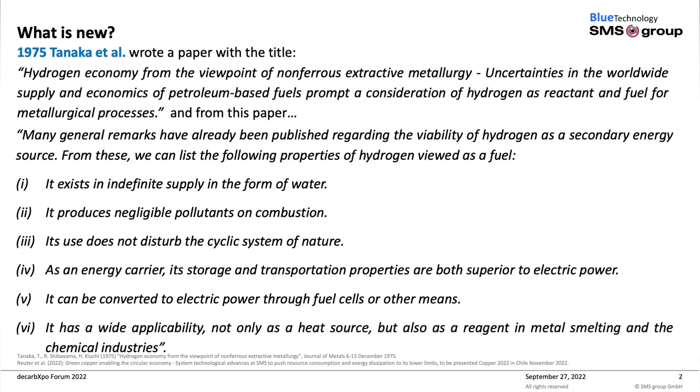This specifically focused on the non-ferrous industry, how you can use hydrogen, for instance, after the oil shock in '73. It's obviously a busy slide, but if you look through this, you'll see all the words we are probably using today: water, circularity, benign, not affecting the environment, etc. It's all there. So I would always recommend, and that's what I say sometimes to students, go and read the stuff in the past.

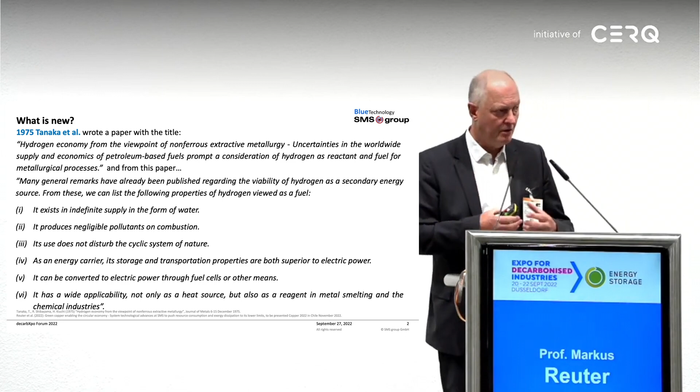You'll be surprised what is already there and has been discussed. Tanaka et al. at the time in Japan looked at this in fair detail, using hydrogen not only as a fuel but also as a reductant. I'll come back to that a bit later, because that is stuff we also do at SMS, which is a very large OEM, original equipment manufacturer for steel technology, but also for copper and non-ferrous. I'll obviously be focusing more on non-ferrous, which is my career.

As I said, I'd like first to define what circularity is in the real sense, because there's a lot of hand-waving going on, and sometimes disconcerting hand-waving. The beauty of it connects a lot of things from the mine to the product, its recycling, collection, and everything that goes with it. Sometimes little bits and pieces are taken out and put up on a high sort of banner that will save all and get all the metals back.

But one thing that always bothers me is that people never really look at the true losses from that system—not only the material losses, but also the thermodynamic losses from that system. Excuse me for being academic, but if I speak about circularity, it's never without thermodynamics in the background, and not only the first law, but the second law specifically. What are the dissipative losses which you really can't return back into the cycle?

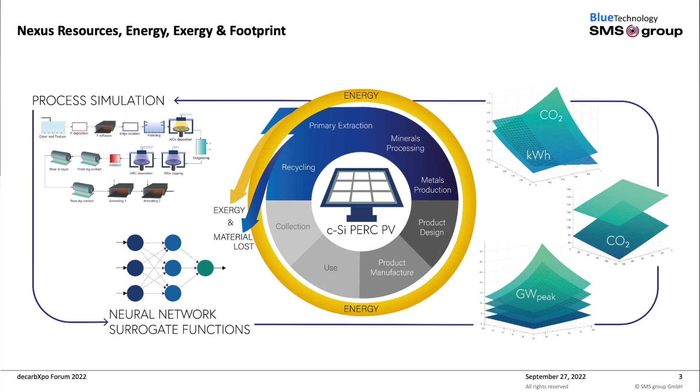Just saying design for recycling is great, or we can close the loop—but I always say that's the Excel mafia trying to close the loop on an Excel sheet. In fact, if you really want to understand this, you need to go to the detail that we, for instance, at SMS do when we design a plant and actually offer a solution that closes that loop.

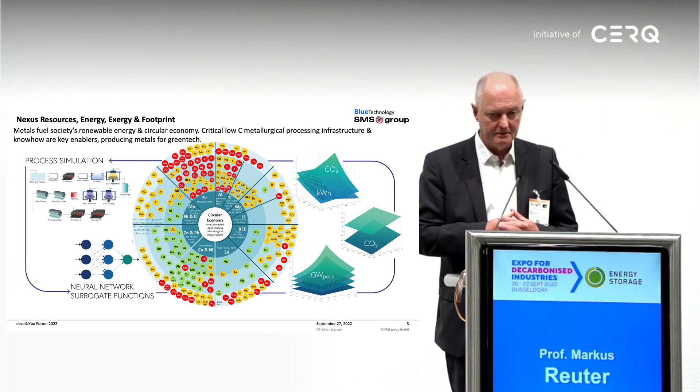What I always try to explain, and this has a long history, is this wheel—we call it the metal wheel—which explains quite simply the following. In the specific times at the moment, one can really recognize the importance of this. You need a base metal industry in society. You need to be able to produce steel, copper, zinc, lead, nickel, etc. That's the inner circle. If you don't have that, you can't recycle.

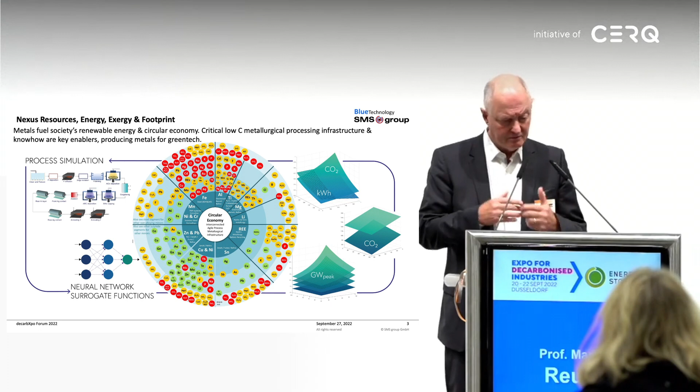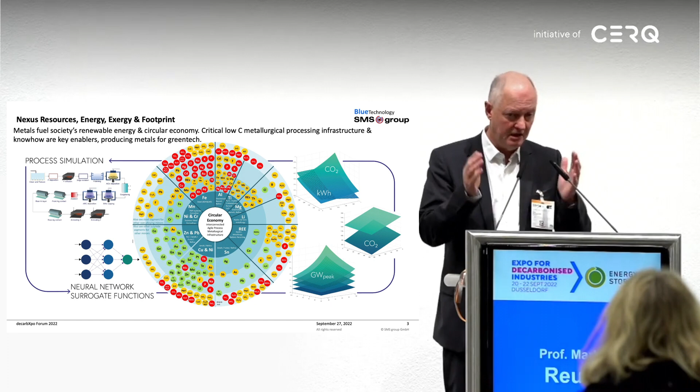Whatever you think and whatever hand waving you do, you can't recover the metals back at the quality required by the products. Have a look at this drawing at your own leisure in publications we've done. But as a summary, you need at the heart of any system in a region, be it Germany, the EU, or wherever, you need the metallurgy to do this, and economically, by the way.

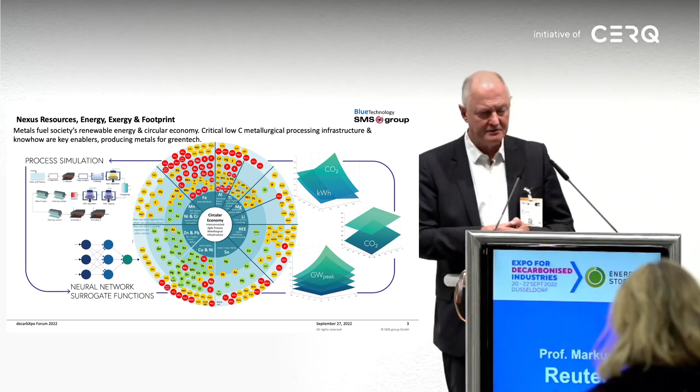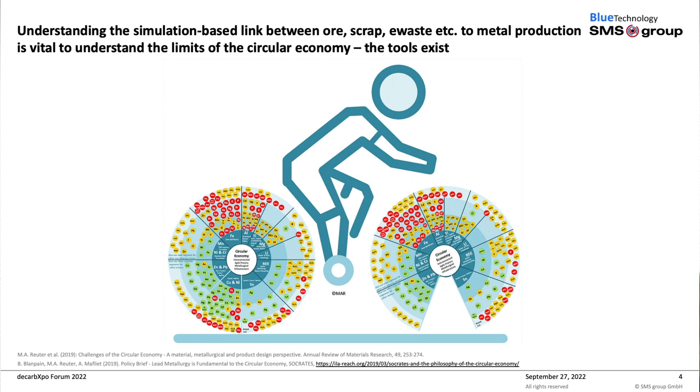So the policy implication of this was the following, and this figure specifically had the intent to inform, among others, the EU and policy. Removing any sector from that system crashes the system, like this figure shows. So we wrote a policy brief on this, showing that you need the metal wheel with all its complexity to do this. To airbrush it and make it all simple, and say it's all too difficult, is just impossible.

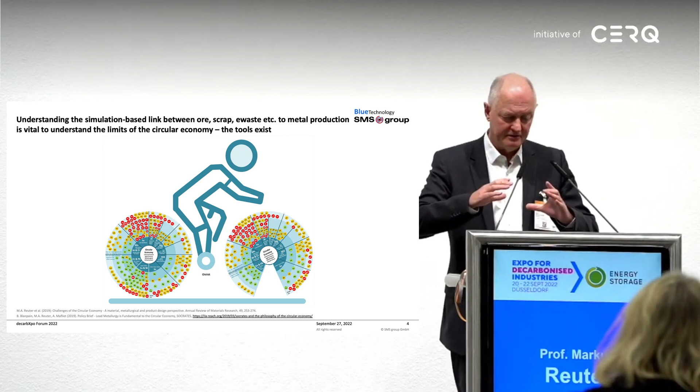You need it, and we as metallurgists know how to deal with this. That's why in my long career, close to 40 years, I've always tried to protect the metallurgical infrastructure as the key enabler for circularity. If you can't bring the metals back, you're just hand waving. It's nice ideas, nice reports, nice stuff.

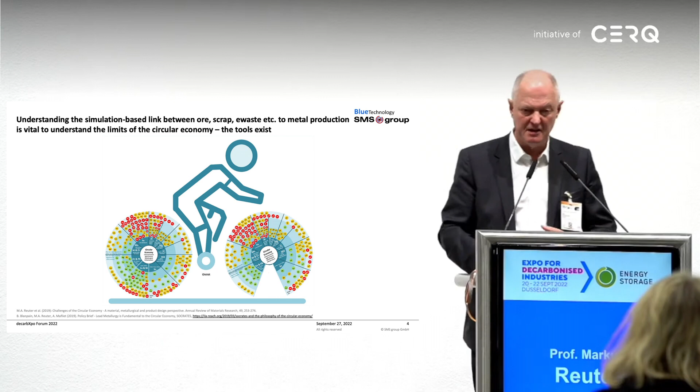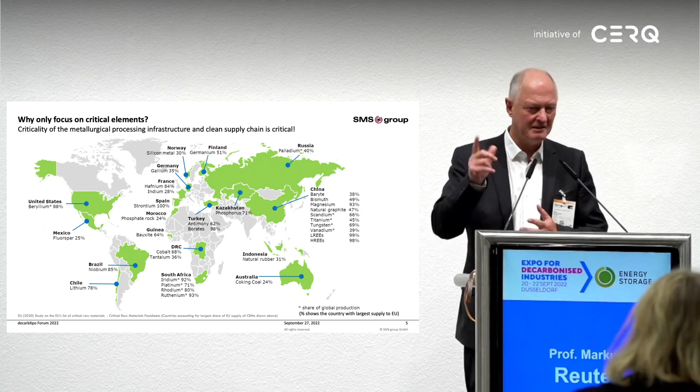So that brings me to the next sheet, that there's a lot of nice reports always appearing on criticality of materials, elements. And I say, well, guys, if we don't have the infrastructure to actually produce the metals, everything's critical. And we see that at the moment. But we are merely writing these nice reports which explain how critical things are. Then I say, well, get the plants to do actually the recycling. This is meant as a provocative question, so if you have a question, later on.

Coming back to a brief, I was told very clearly not to do any sort of sales talk here, so I've kept it purposefully down to some physics as well.

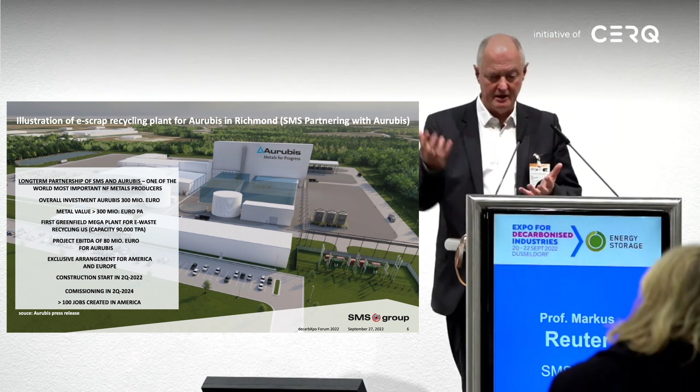Here's a nice example from our company, SMS, which is building this e-waste recycling plant in the US. It's the first greenfield plant that has been built in a long time in the US, by a German company, Aurubis, which is situated in Hamburg. It's actually trying to bring this together, bringing e-waste, which contains many elements, back into the cycle with the whole refining infrastructure of the metallurgical industry. So a very interesting example.

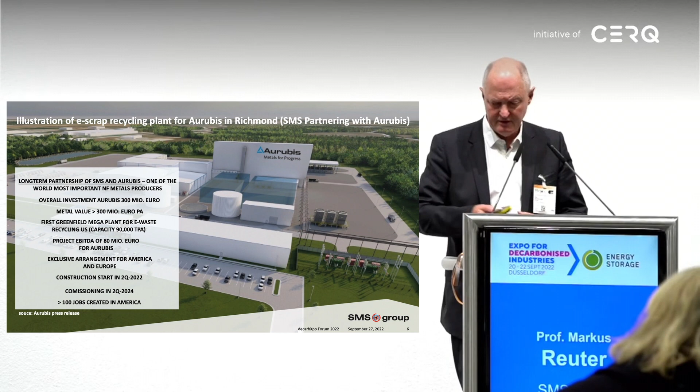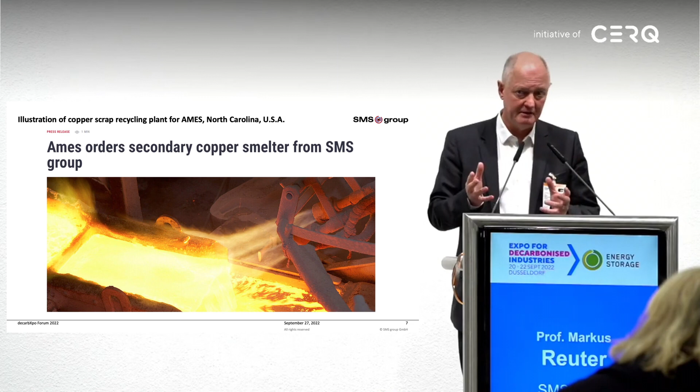We're just in the process of designing this very interesting project, and obviously also processing a fair number of tonnages of material. Here's another one, this is copper recycling, also in the US, in this case in North Carolina, and just actually doing this. So what I'm saying now, it's not just hand waving, it's happening, and it should happen at various places in the world, and most certainly also in Europe.

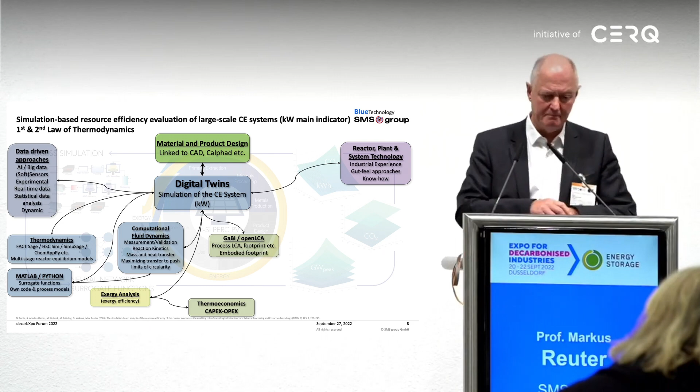So let me get back to some theory once again. The previous talk was speaking about AI and big data. I did my PhD on AI 30 years ago. We tried to apply it in our industry, and it's now obviously mainstream. But if you want to understand the big systems, you cannot use Excel sheets, you cannot just do some simple flows of materials. You need to understand the physics.

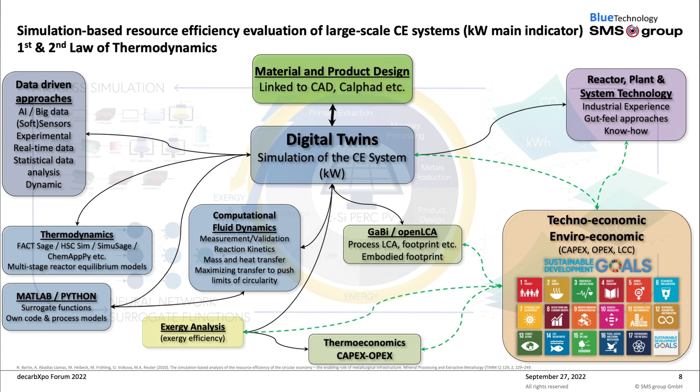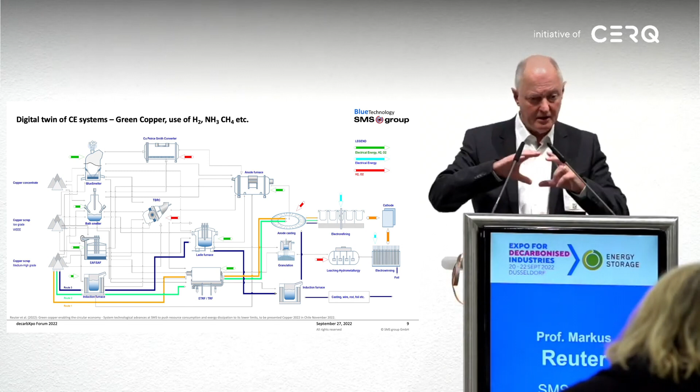So here we just show what we do also internally in SMS. We bring these tools together to design plants. Once again, it's not just theory, it's practice to do this, and obviously then bringing together the sustainability goals if you can. So an example, and once again, perhaps too complex a figure for this venue.

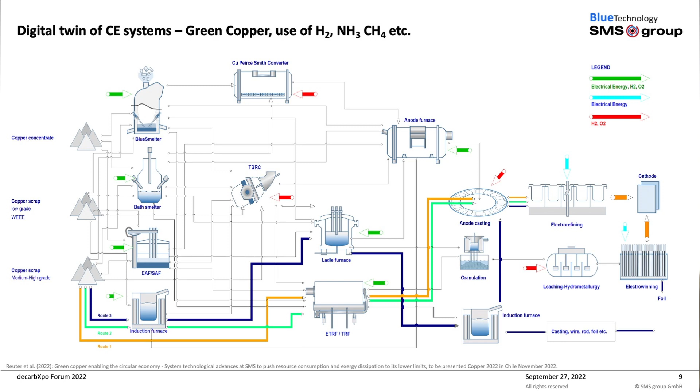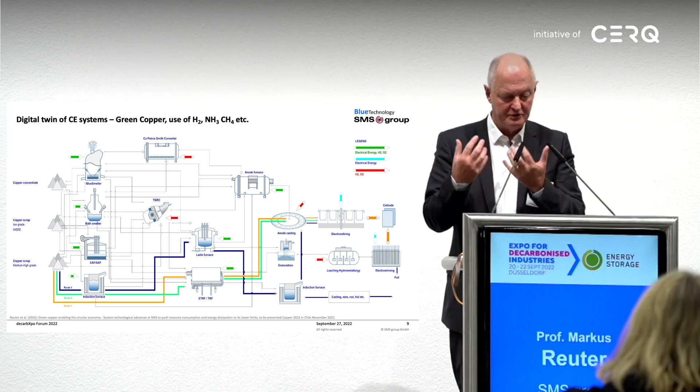Here we're trying to understand our different plants that we're supplying as technology, and understanding what is the true efficiency if I use hydrogen, ammonia as fuel or as reductant, or methane, and what is the best configuration. This is true decarbonization. You're trying to understand the system, how best you can connect systems to produce copper in the most green way as you can. But you need the physics to get that.

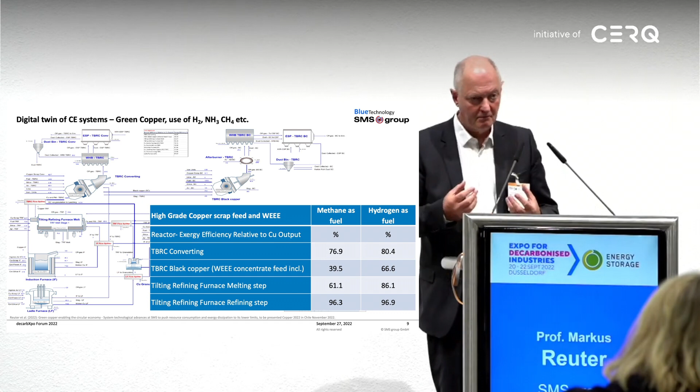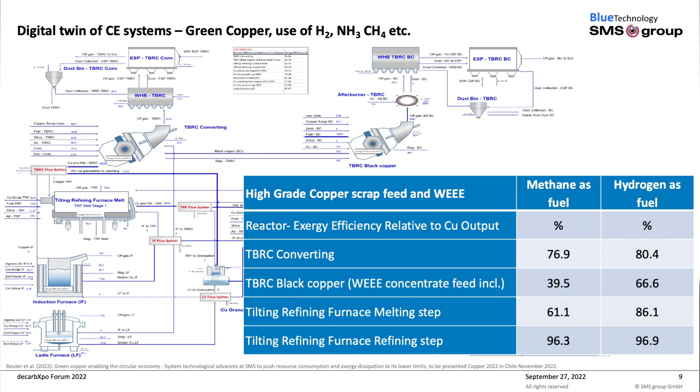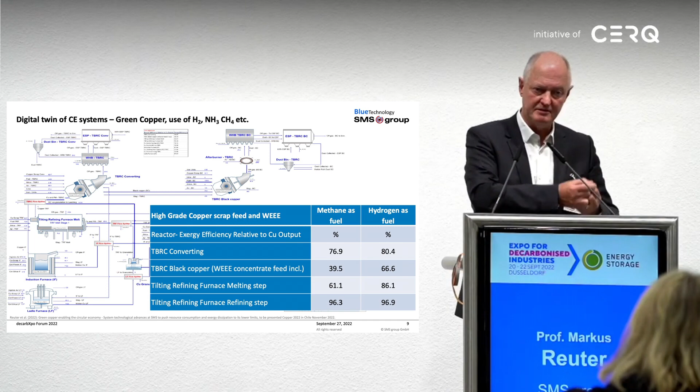And ultimately, if you look at the blue box there, you can then understand the exergetic true efficiency of that system, and that's what makes a system profitable in the end. So if you're designing a plant, you need to know this information, and the clients are actually asking this information from us. So, by the way, there it is, so we can do this. And it's not just academic, it's actually happening in the company I work for, which is a very prominent technology provider globally.

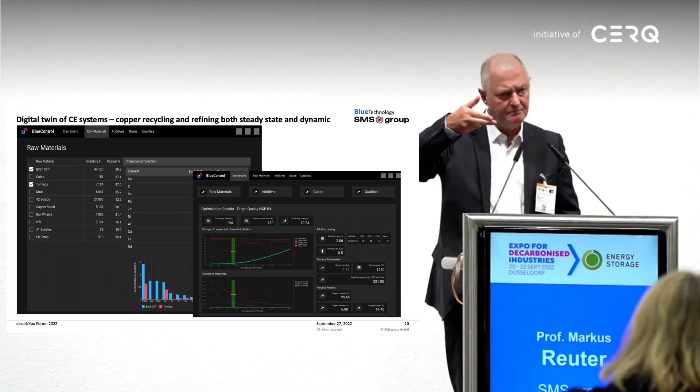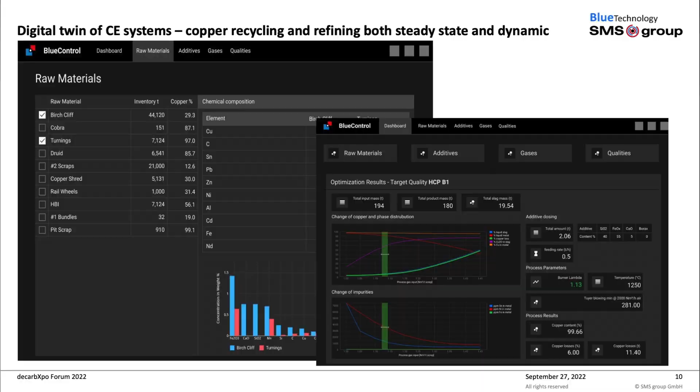Once again, we spoke about digitalization. If you want to really understand the true performance of the system, you need to know where the elements go. I'm always so surprised that people talking in the circular economy environment tend to look at elements individually. You can't do that. You have to look at them at the same time.

Here's a digital tool that we use to predict the copper quality after the smelter, which I showed previously, for instance the one we're building in the US. So this is real. If you do circularity, you need to know where the tin goes, the nickel, etc., which are all associated with the scrap. That is our daily business.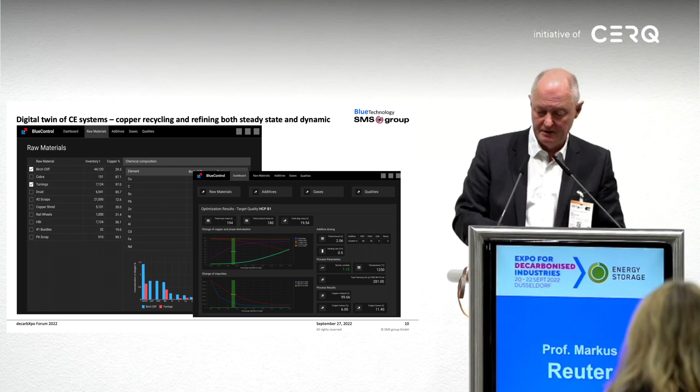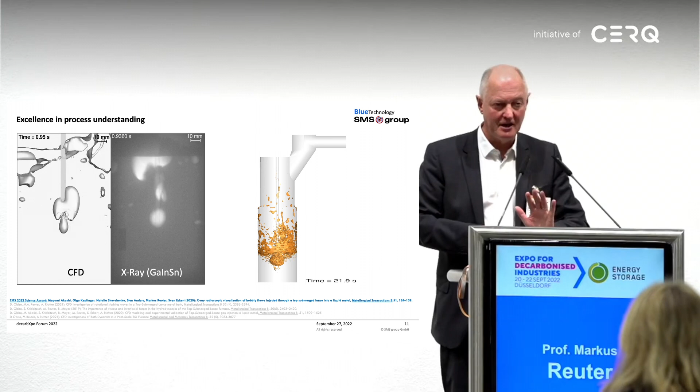I'm not going to explain this at all. I'm just trying to show with this, you need to understand the physics. So let me go to a final concrete example, just to make this clear. This is all about decarbonization. We speak about PVs.

I was involved also in the Helmholtz organization in this country. One of the projects was to look at the efficiency of PVs, not only from the material science point of view, but from the system perspective as well. So what is the true recyclability, the circular economy of PVs?

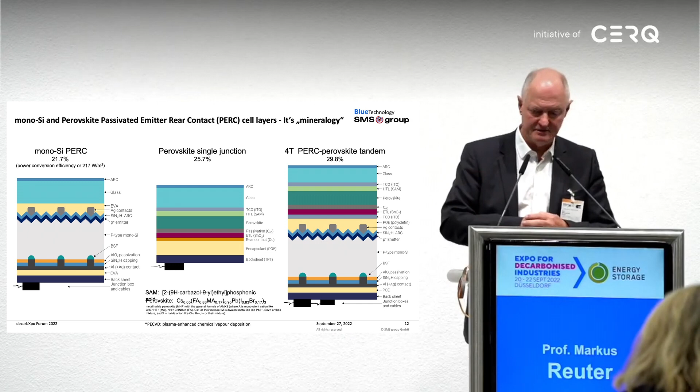So here are, I would call them minerals or design or whatever you'd like to call them, that provide this efficiency between PERC cells to tandem cells on the right-hand side. But you can see they are pretty complex, and trying to understand the circularity of these is not that easy.

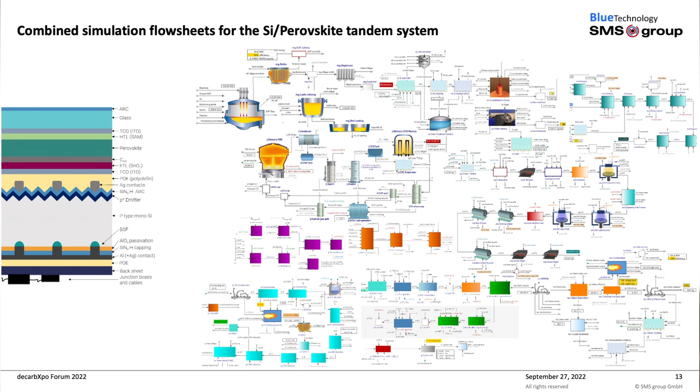So, once again, a busy slide, but don't look at the detail. If I'm creating that PERC cell and I'm recycling it in the circular economy, you need all those plants. That's the detail. And I'm always dumbfounded how things are simplified to nonsensical results in the end. But in the end, this is what you need.

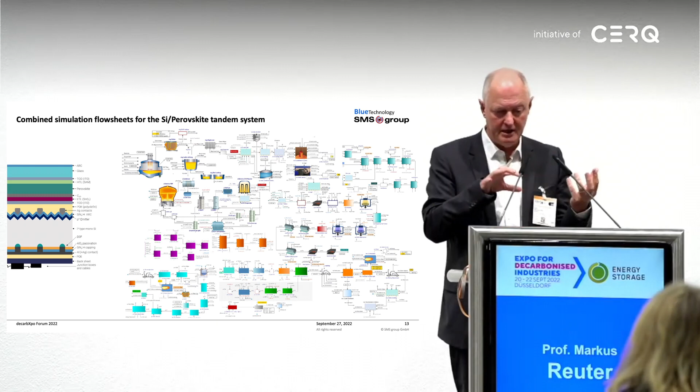This is the material flowing in, you design the product, you manufacture the product, and you bring it back into the cycle. Exactly that circular economy picture that I showed earlier. So this figure here, bringing the bits together, this is what you need to do.

I can give you this nice 'circular economy is going to save the world' talk, and I can recycle everything infinitely. That's utter nonsense. And this figure, you once again see the dissipative losses from the system, which we can quantify. They cost money. They make the system work or break wherever it is done in the world.

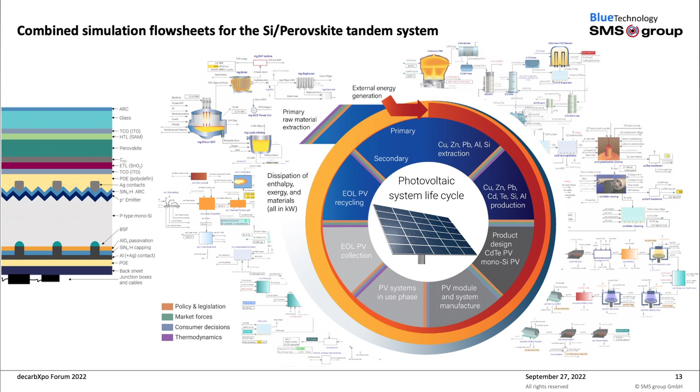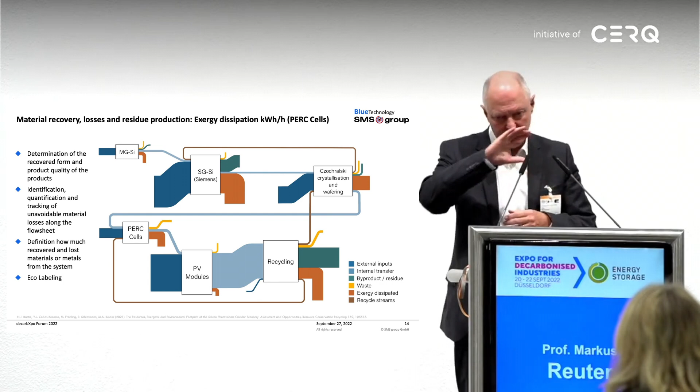So, some results, and I've simplified this in a simple figure that just shows the normal sort of simplification that is used to make it tangible to policy people. But just as a summary, the material flows in, it's recycled, it's linked also to the PERC type cells, brought together and recycled. So let's just quickly look at some results, and you can see this all in the academic literature.

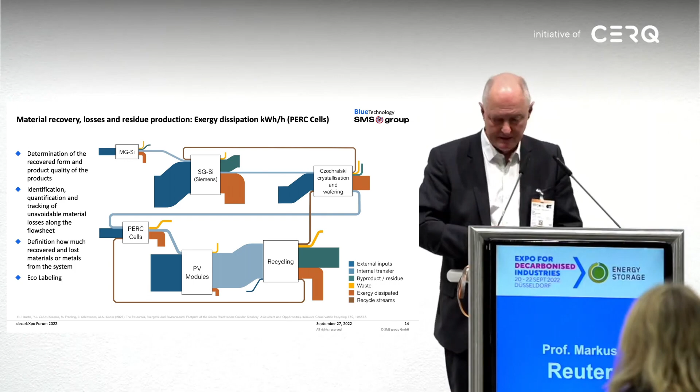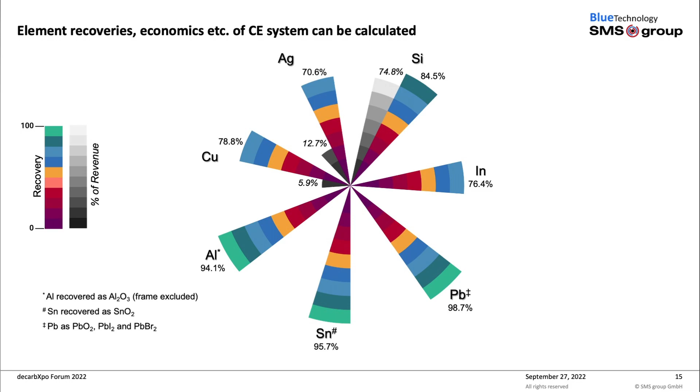So this is all peer reviewed. We've done this over the last 3-4 years. So if you have this nice big model, you saw all those plants, then you can precisely, well not precisely, but within the framework of those models, calculate the recovery of elements. You can estimate the economics of it. If it doesn't work economically, you can forget it.

And this is what this figure shows. And it also shows that you don't just recover elements, you recover compounds, you produce compounds, you produce alloys, high quality alloys that can go back into the product.

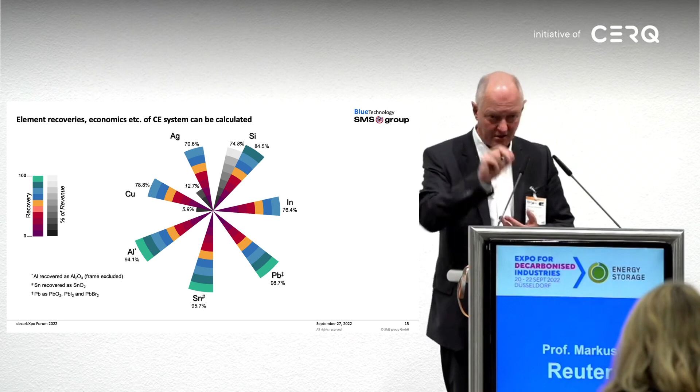So one of the other statements that I always make, also to students, also here now: true circularity would mean the copper that I have in my mobile phone goes back to that mobile phone. That is circularity. If I'm talking about design for recycling, if I'm talking about closed loop, I'm not speaking about open loop. Closed loop, you need to understand that. And I'll get to that in my last slides.

So what can you get out of this once you have this structure? We've created all the software platform to do this. I teach this to students in block courses. So nobody can tell me this is all too difficult because they've not been trained in it.

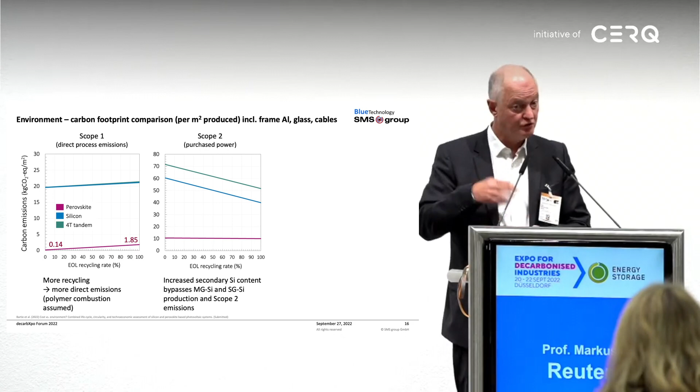But ultimately, you can then very simply get scope 1, scope 2, and scope 3 for looking at the effect of recycling rate on the carbon emission and all the other emissions. Please note, we have created the software over the last 10 years to do this, also through the industry side, not through academic industry side, to actually help industry footprint processes that have not yet been developed, that are not in the LCA databases, to actually footprint them and provide information to clients if that is so required.

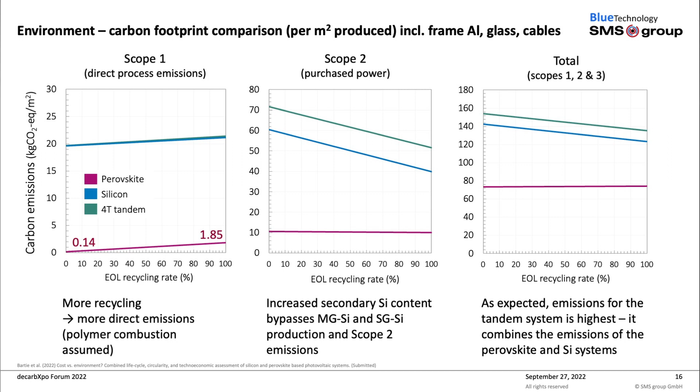But here you can see for the different cell types what the results are. And once again at the bottom you can see that these references are there. So what can you do with this?

Remember that big flow sheet I showed with all those reactors? If I would place them in different regions of the world and look at the effect of recycling rate on the carbon footprint, you can clearly see that one should start thinking: if I'm using green tech, the metals must also be green, as shown here. And that's not always the case. Otherwise, we're just hand-waving.

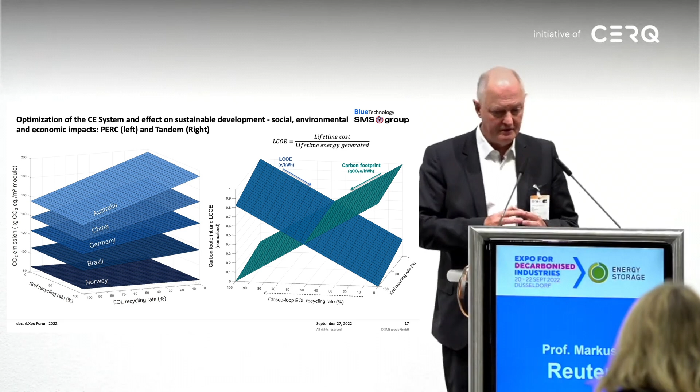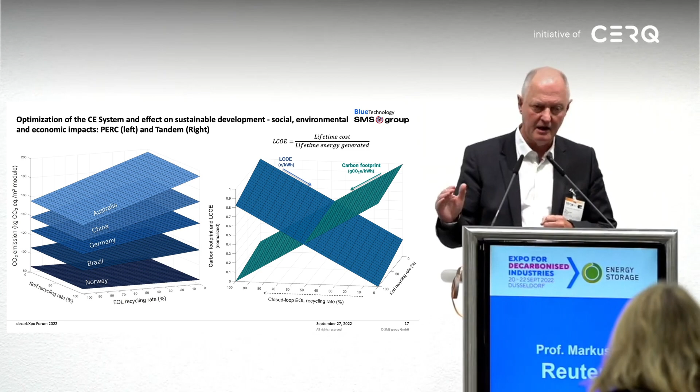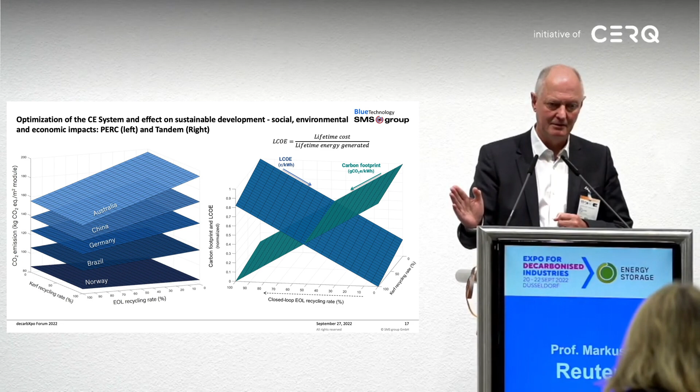Then ultimately, this discussion comes back to everything must be recycled. This figure shows the lifetime cost energy generated on the right-hand side, in this case for a tandem cell, as a function of recycling rates. There's an optimum between the two. You can't just say we want to recycle 100%. There's an economic optimum, and you have to understand that to maximize the system.

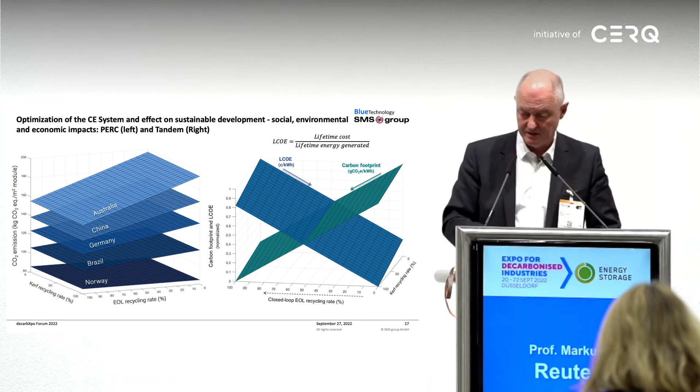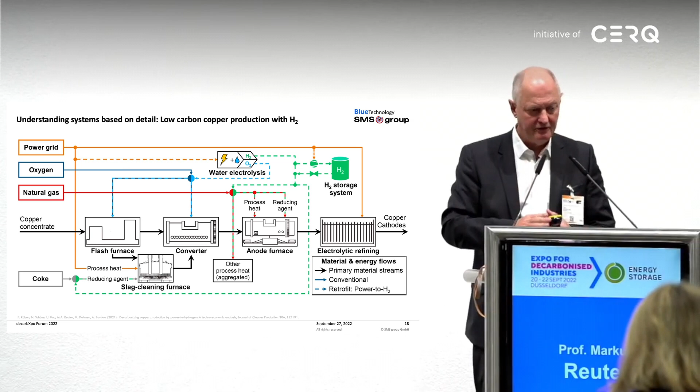So closer to home, some work we've also done to show, once again, coming back to technology - this is not just nice talk here. Here's a typical flow sheet of copper production. The copper you're using in these wires - we've looked at systems like this. How can we integrate hydrogen into that flow sheet, and what's the economics of that? It's not just about copper, it's about all the other elements that are also created. In this case, copper concentrate is produced and processed to copper product.

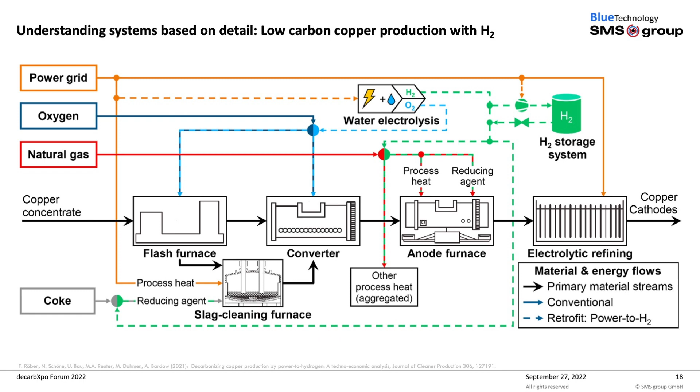So you can use hydrogen in various ways, as a fuel and as a reductant. Exactly what was said in 1975 already, so many years ago - it's being done again. But it's all been tested over the years. In my whole career, I've seen so many times that things have already been applied.

So what do you ultimately want to look at? What's the economics of this? What must the carbon price be for which type of electrolyzer - be it PEM, solid oxide, or alkaline system? Where is the economics of that? Here's a very nice graph that shows this in the publication listed at the bottom, from a PhD student who just graduated 2-3 months ago on this. But you can also read this in the scientific literature.

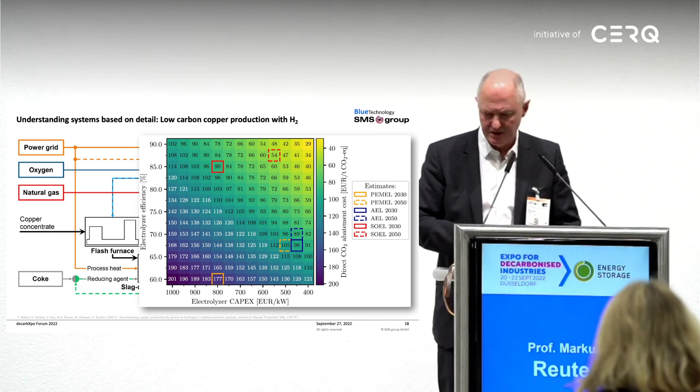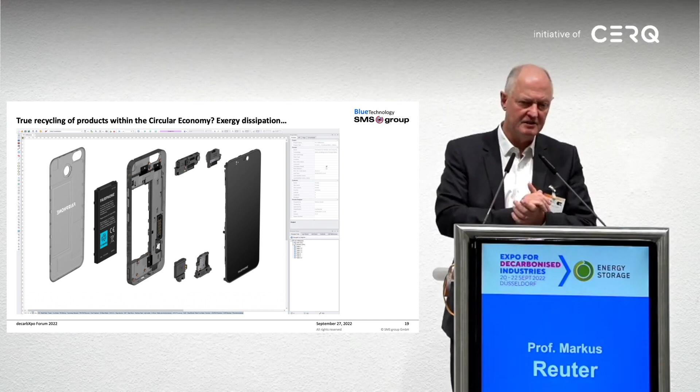So let me end off, Chairperson. Once again, I looked at this bigger picture of circularity. One thing that has always floated is that design for recycling is going to be the savior of all things. There's one company that has always been brutally honest, and that's Fairphone. I've been working with them for close to 5-6 years now. Here's the Fairphone 2, and they just wanted to know what's the true recycling rate. So we put this all into a pretty large model around 2016. Here it is, it's real.

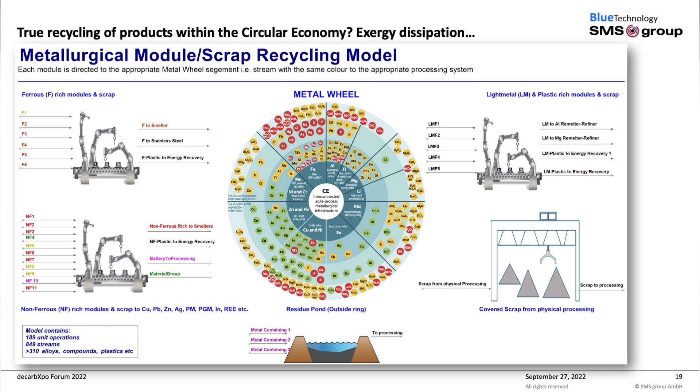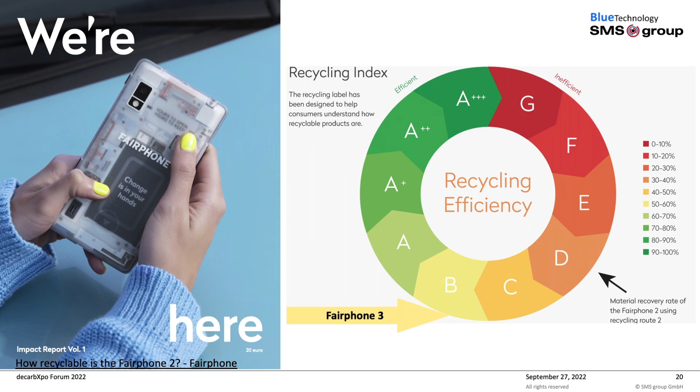So what is the result? You can read it in their report. We tried to float the recycling label - it hasn't been taken up yet. The fact of the matter, shown on their webpage, is that the recycling rate of Fairphone 2 is about 30 to 40%. And they've changed the design according to the first simulation - true design for recycling - to get it to the level it's now at for Fairphone 3.

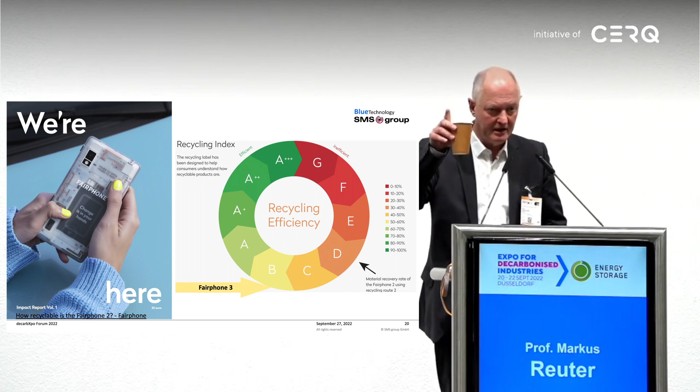And so, can we recycle a mobile phone 80%, 90%? Once again, nonsense. Circularity means I take the Fairphone and get that metal to the quality that goes back into that Fairphone. And just as I'm speaking about circularity, that's what this is about, and it's not so easy to do. I always say, if I take my cup of coffee from yesterday and try to make the same quality cup of coffee today from yesterday's stale coffee, you'd immediately understand it's virtually impossible to do economically or even in the real world.

So in conclusion, circularity - what I try to show is the connection of the different aspects. I can't show everything, but what I also try to show is that all units in that circular economy can be quantified as kilowatts: the energy flow, like we did in the PV set, created by the system, the material flow as exergy in kilowatts, the exergy loss as kilowatts. No fuzzy factors, just physics.

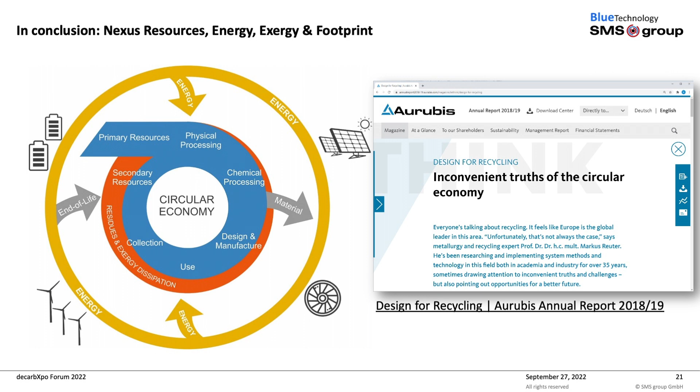And we need to do that. So I had this very interesting interview with Aurubis, where we actually discussed this, and the industry is also discussing this: what is the true limit of this stuff? Aurubis, as I said earlier in the talk, is the plant we are building in the US for e-waste recycling for this company. So the inconvenient truth is the figure on the left-hand side, which shows all these losses.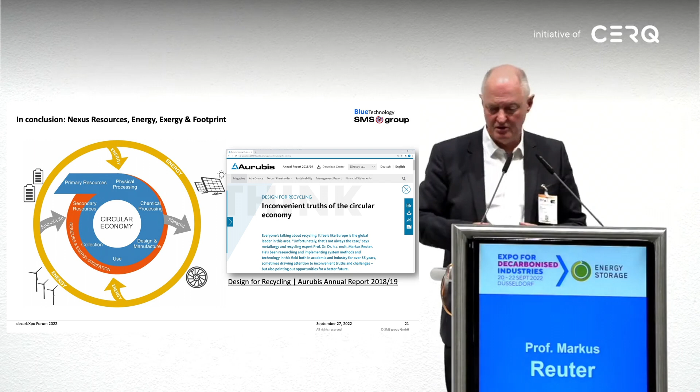So it's interesting, the Journal of Sustainable Metallurgy actually has that figure as the leitmotif of their journal, just to show that sustainable metallurgy, sustainability, is truly about physics, not nice talk.

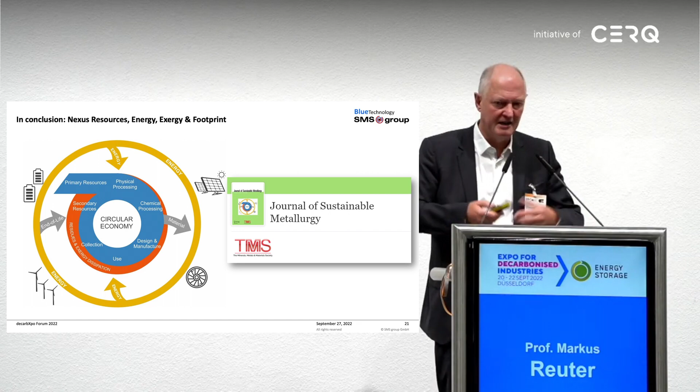So I leave you with that talk. We've also just finished a Handbook of Recycling, second edition, with a lot of this information, hopefully ready by end of this year or early next year. Thank you for the opportunity to talk and be here with you this afternoon.

Thank you, Markus, for having the courage to talk about inconvenient truths. As a publisher, I'd like an article from you, because I think we need a much more systemic approach for closing the loop. If we don't do this systemic approach, we have no chance to really have a circular economy.

That's right. You've actually captured my talk in other words. You need to have an overview, but without forgetting that your feet are on the ground, which is governed by physics.

So who is responsible to make the systemic solutions happen? Is it politics? Is it companies? How can we bring the different players from different industries together? As I showed, inside SMS, we're actually doing this.

From the company side, we need to understand the processes in this way. From the other side, with my hat as an honorary professor, I give a block course of 80 hours where I teach young people how to do it, and you'd be surprised how many people come. So I think bottom-up will help a lot to actually start pushing it and ask, hey guys, are you talking sense or not? So I'm burning the candle from both sides.